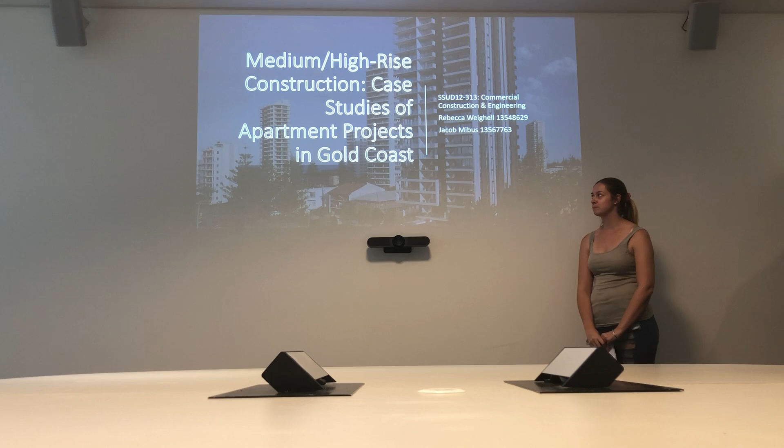We've looked at two buildings specifically, high-rise apartment buildings to be built on the Gold Coast. The two buildings are the Opus and the Encore, both situated in Broadbeach.

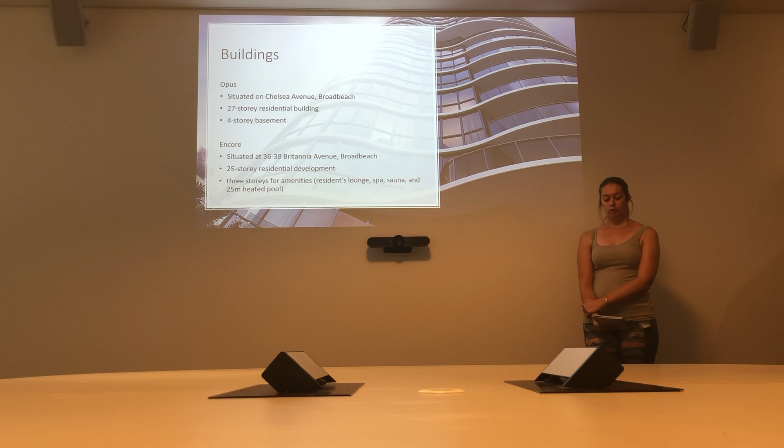Opus is being constructed by the Morris Property Group. It's a 27-storey building plus 4 storeys of basement, currently valued at $115 million, with 99 two-bed apartments, 13 three-bed, and 1 penthouse.

The Encore, being constructed by Hutchinson's, is a 25-storey development with 84 apartments and is valued at $78 million.

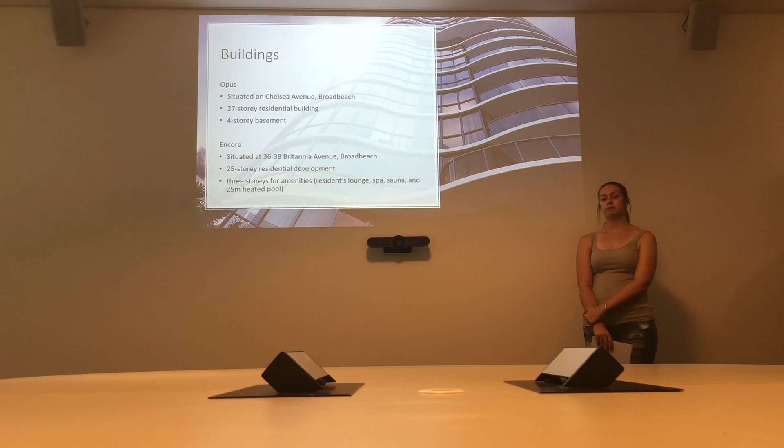The retaining systems used for the basement excavations are different at each building. At the Opus, they're using secant piling with permanent retaining walls, using male and female piling. The primary piles are the smooth piles, classified as soft, whilst the secondary piles are the rougher piles, classed as hard. These walls are braced prior to the slabs being poured at the higher levels.

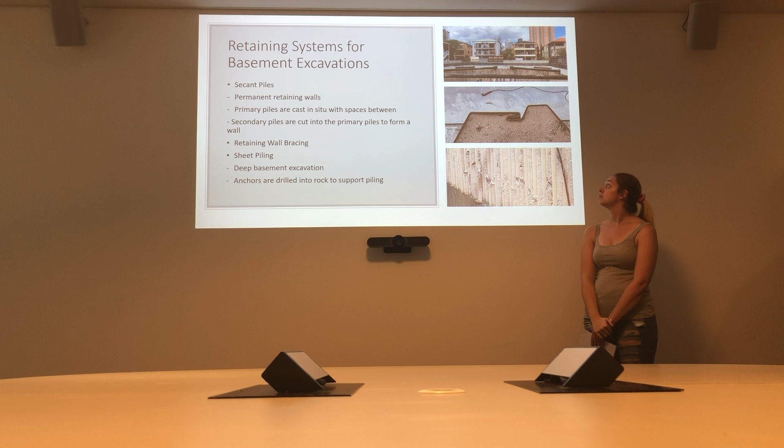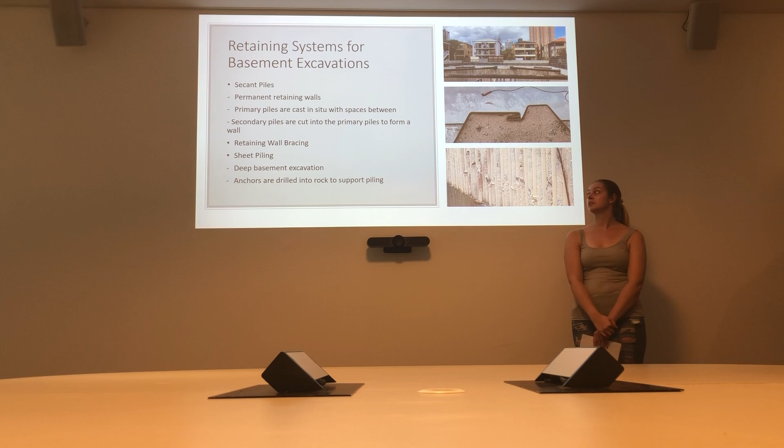At the Encore, they're using sheet piling, as can be seen in this image - interlocking panels used to retain the soil. These are used for deep basement excavations such as this, and they're supported through anchors drilled into the rock.

The dewatering systems at both sites are pretty similar. There are a large number of projects happening in the area, and due to this, the water table is a little lower than it would be otherwise. Encore, for example, drilled 5 different well points and are only using 4 because of this.

The water here is filtered out, so a certain amount of sand per day is filtered out prior to the water being moved into the storm water system. This water is checked on a weekly basis to ensure it meets legislation.

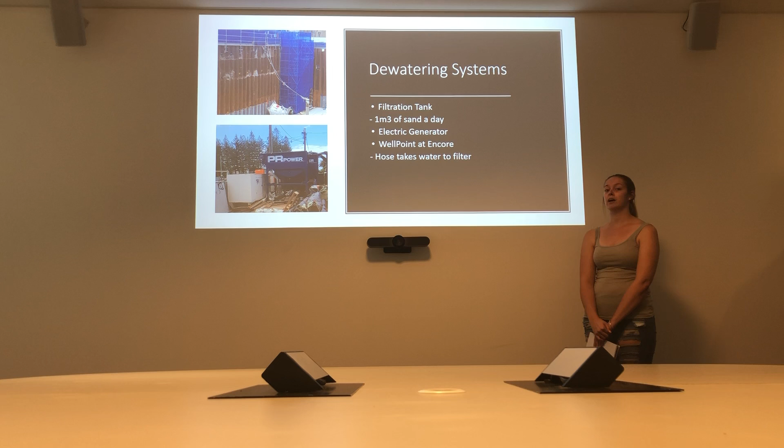There is also a generator on site in case of any power outages, to ensure there are no problems with the dewatering system, because it would flood the area if there were any problems.

With regards to dilapidation reports, these need to be carried out prior to and during construction of the neighbouring buildings. Pre-construction, the neighbouring buildings are checked by a surveyor - they're measured and photographed as to any damages that may already be present. Then on a monthly basis a surveyor comes in to check each building for cracking or anything, to ensure there are no problems occurring to the neighbouring buildings.

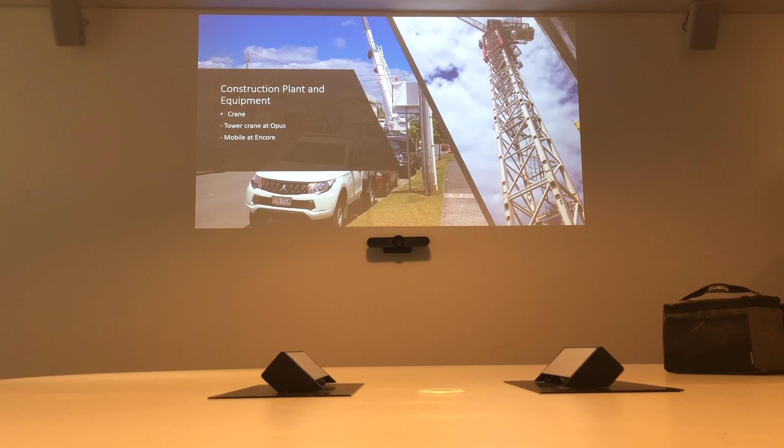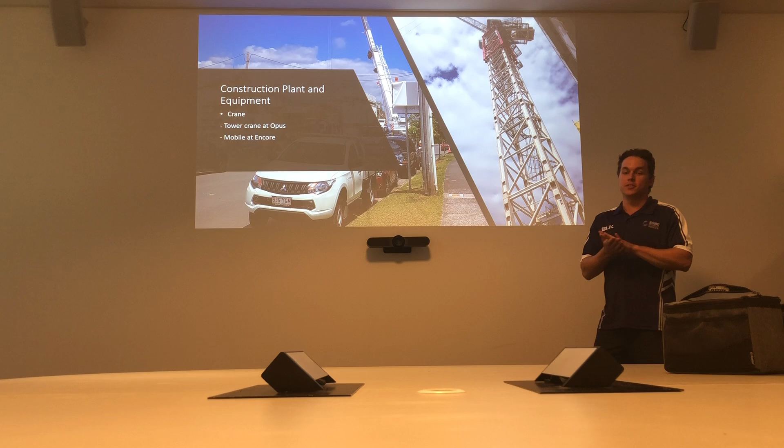A tower crane has been used at the Opus site. The tower crane has the ability to essentially build itself - as the development gets higher over time, the crane can lift itself up and insert extra pieces to go higher. The Encore site currently wasn't ready for the crane, so they're using a mobile crane just to install stuff.

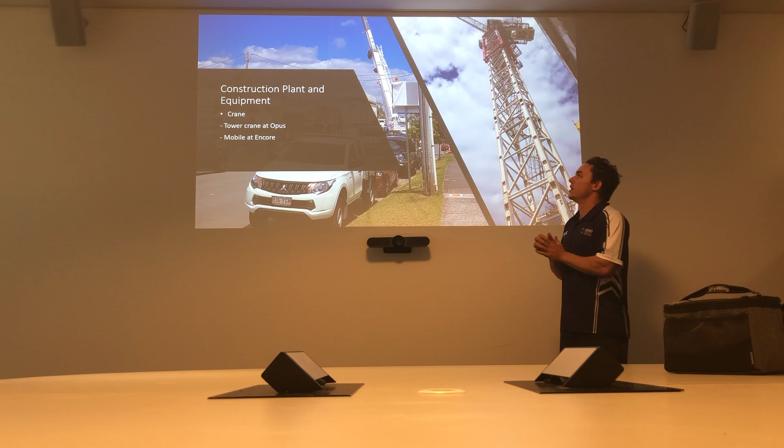And get anything in they need to get in. There is a section for it, just the concrete hasn't been poured yet.

Both sites are using the same scaffolding system, mainly there for safety purposes. All the scaffolding is around waist height or just above waist height, so it doesn't let you fall off or try to jump off.

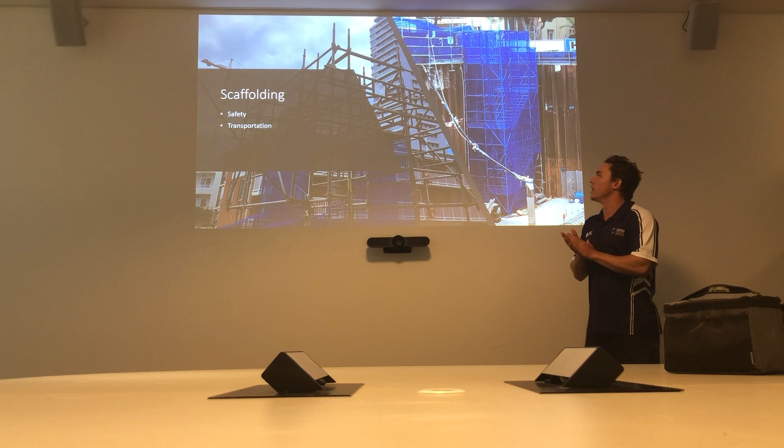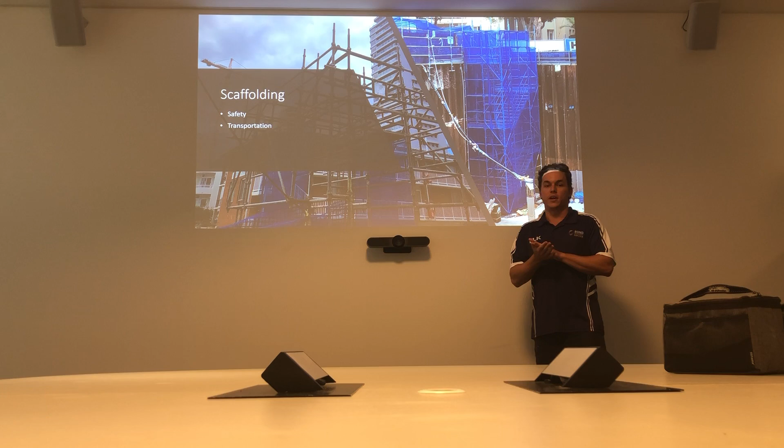That's why the mesh is there as well. It also allows you to transport yourself up and down the site, since the sites aren't very accessible and are quite a large hole in the ground. So the scaffolding just allows you to move up and down.

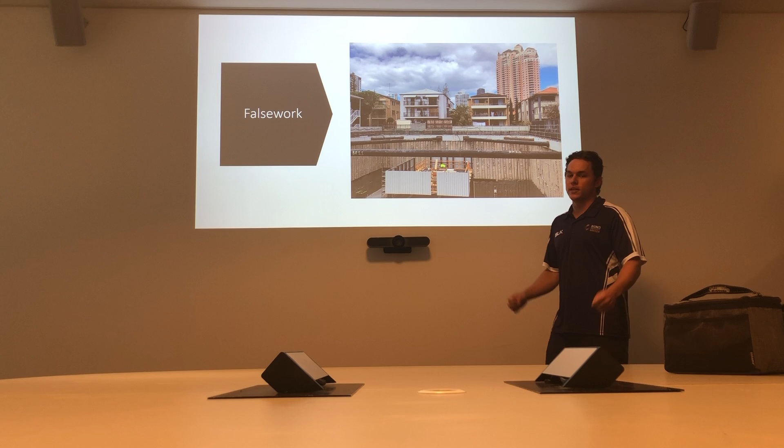At the stage when we arrived on site, we didn't get to see much falsework, but the main one was pretty large - these steel members. They're actually welded to the plates around the edges here, and once the next slab is poured and set, these members will be removed.

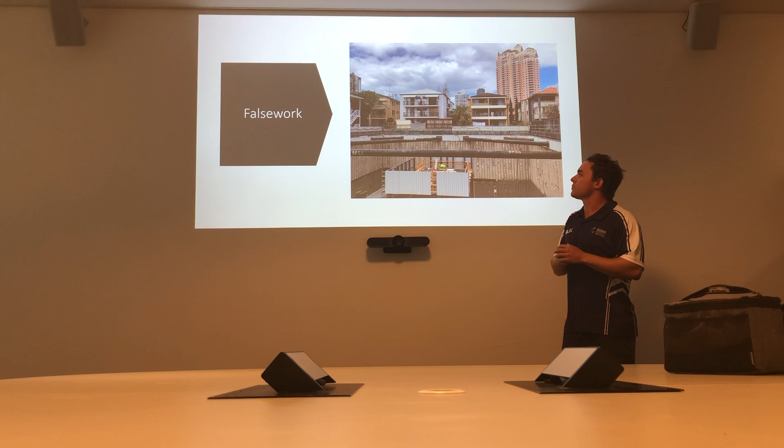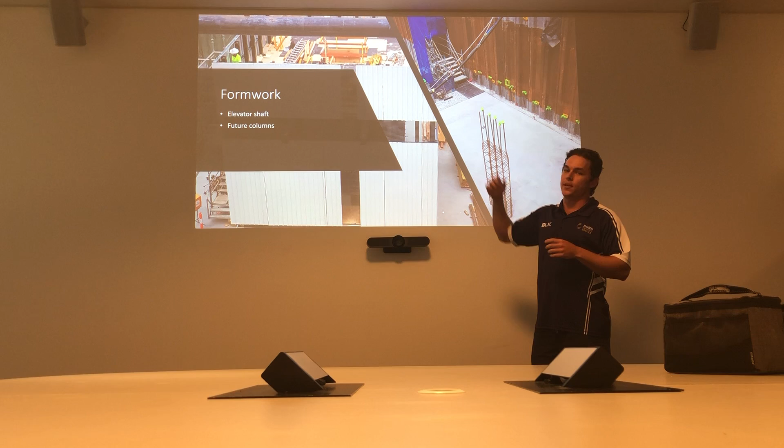There are two main areas of formwork we saw. The first one was the elevator shaft, which you can see here. The tradies up top are fixing the formwork, ready for concrete to be poured. Once it's poured, or once the concrete's set, the formwork will be removed.

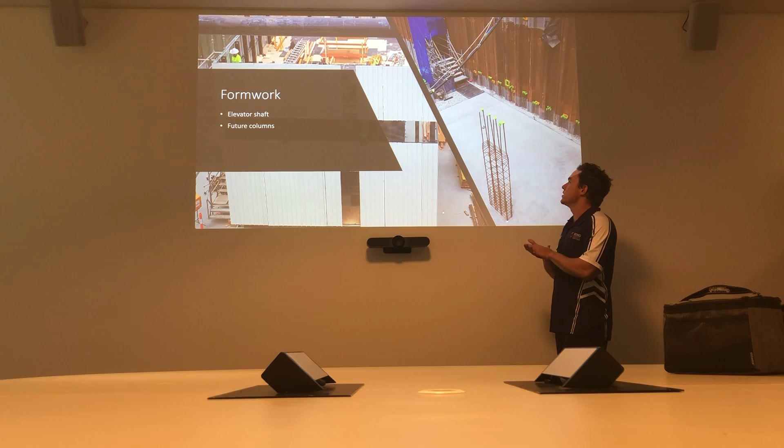Over here, we can see the steel reinforcement out of the ground. Obviously there's no formwork around it now, but eventually there will be, and the concrete will be poured. Once set, again, it'll be removed.

Both sites consist of raft slabs, poured in 3 different sections. This is because the sites are so large and so much concrete needs to be pumped in that they didn't have the ability to pump it all in at one time.

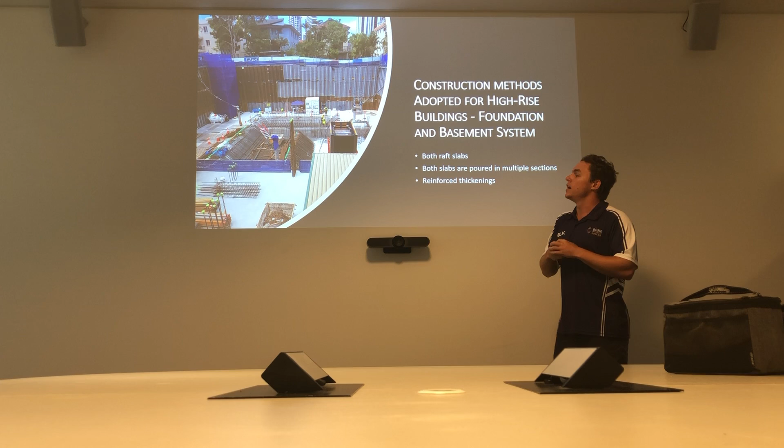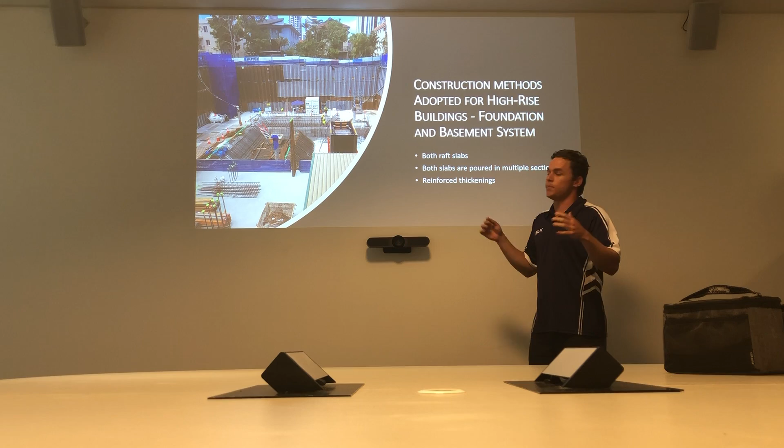This helps with having a split concrete system - a split slab system allows the slab to last longer. It also helps with cracking, giving it the ability to move around a little bit, and it can be repaired much more easily - instead of removing all of it, you can just remove little sections.

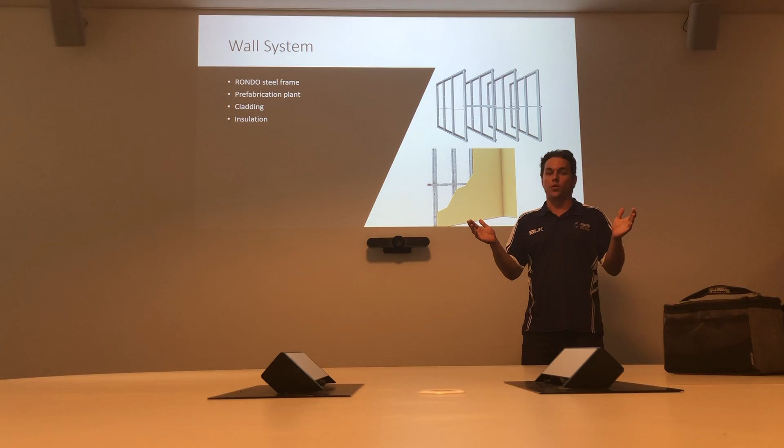At the time we arrived, there was no walling system in place and we didn't know what they were, so we had to make an assumption - we're basically going to use a steel framing system. The steel frame system will be made at a prefabrication plant, allowing us to bring steel to the site whenever we need it in a timely manner.

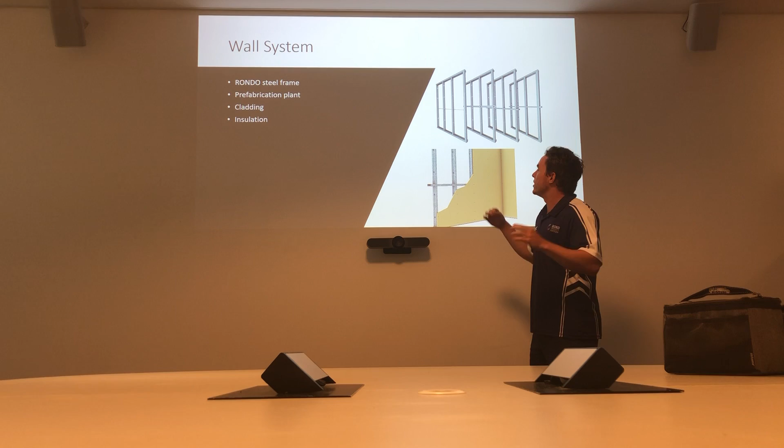Eventually, once the walls are fixed into place, there'll be insulation put inside, then cladding screwed in and fixed off, and further painting and whatnot.

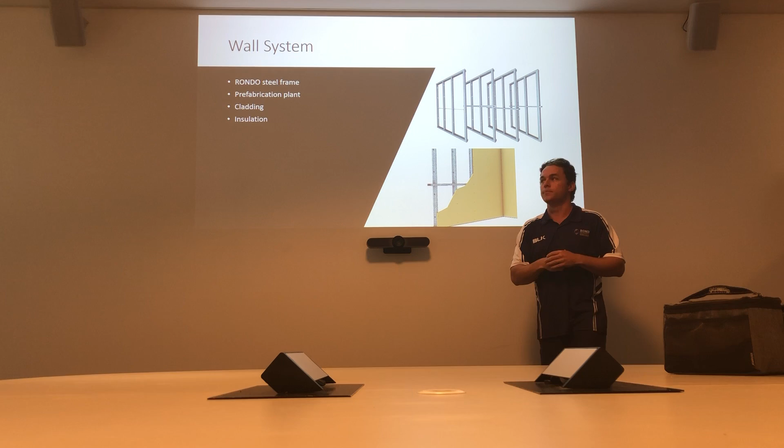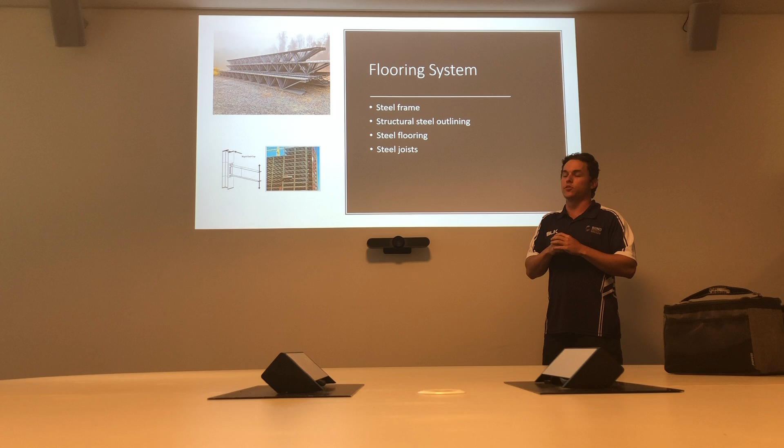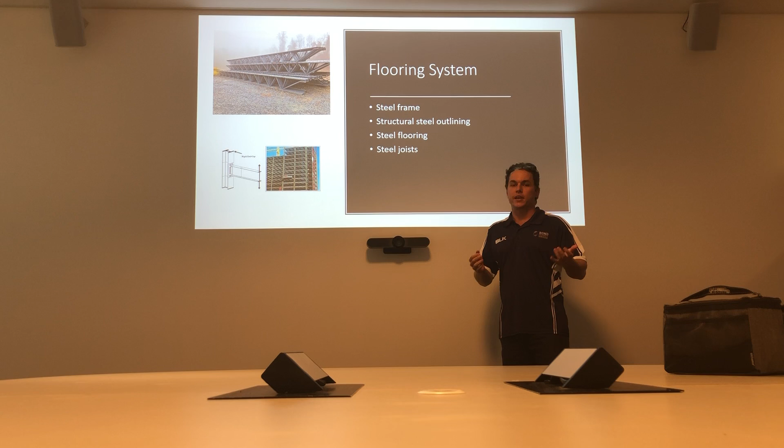In between levels and on top of the flooring systems near the walls, there'll be steel joists used. This allows us to run cables, plumbing, and other services, and can also create a noise barrier, blocking some sound out.